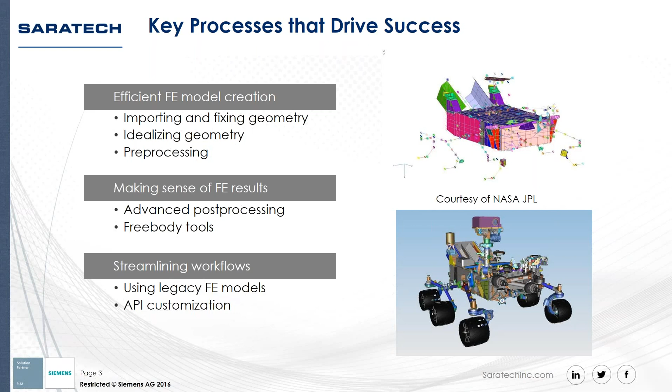In this webinar, we'll be covering 3 main chapters, and we'll address many of the issues that can be found in the simulation process and show how they can be overcome. The areas we'll be looking at are the creation of an FE model, going from reading in CAD data to idealization and model setup. Then we'll look at post-processing of results and how that can be handled efficiently. Finally, we'll look at how you can streamline your workflows, in particular the power of the Application Programming Interface, or API, and how you can efficiently work with legacy models.

FEMAP is the graphics program that provides pre- and post-processing functionality to build the simulation model and prepare it for analysis by the solver, then review results afterward. FEMAP opens up simulation by being both CAD independent, where CAD data can be accessed from just about any source, and solver neutral, so FEMAP can create simulation models for all the major commercial solvers with a high level of integration with the Nastran solvers. The modeling and visualization capabilities are all accessible within an easy-to-use and intuitive user interface, which brings many benefits, including increased productivity, a reduced learning curve, and training overhead.

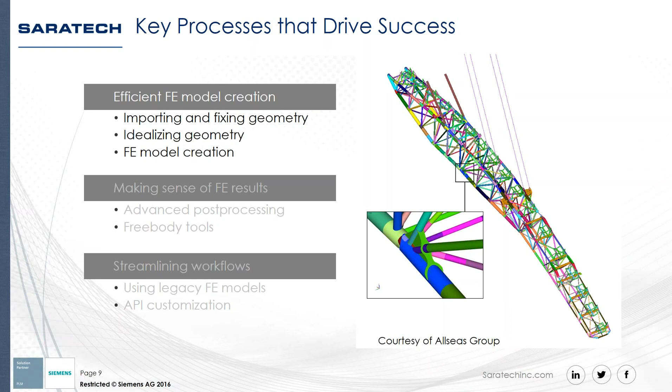In this first chapter, we'll cover the areas in pre-processing where FEMAP can help you create an accurate FE model as efficiently as possible, while overcoming the traditional obstacles that analysts face every day with the use of existing CAD data, idealizing that CAD geometry, and then the process of meshing that geometry to create an FEA model.

The flexibility of data flow is key to a standalone, CAD independent program like FEMAP. FEMAP can leverage and import the CAD model for most CAD systems and then use it as a starting point to create the simulation model. The FEMAP modeling engine is based upon the Parasolid modeling kernel, which is the same as that used by SolidWorks, Solid Edge, and others. So FEMAP and Solid Edge are fully associative, which allows the direct transfer of parts and assemblies.

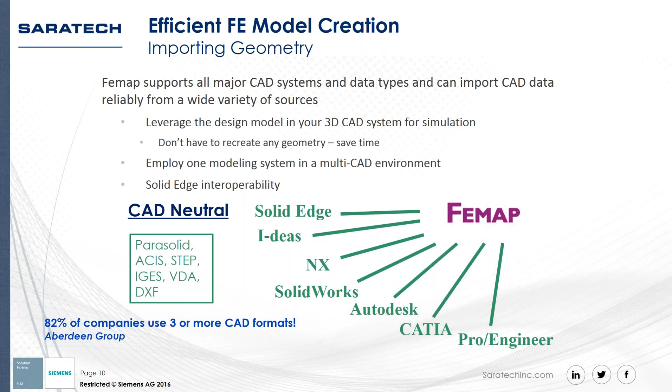Once the CAD model has been successfully imported into the simulation environment, there are various challenges that have to be overcome. In general, the CAD model contains more information than is required to create a simulation model, with details like fillets, chamfers, and holes that may just be too small to be of any significance. If left in the model, they will lead to the creation of small elements that try to capture the small detail, giving rise to overly large FEA models.

Besides small detail, the CAD model may also contain problematic geometry that can impede the creation of a finite element model. Items such as sliver surfaces, short curves, etc. will misguide the mesher, and if left unheeded, can lead to the creation of badly shaped elements.

So how can FEMAP help? Well, FEMAP has tools that will automatically or manually defeature a model without oversimplifying the model data or losing any vital modeling detail.

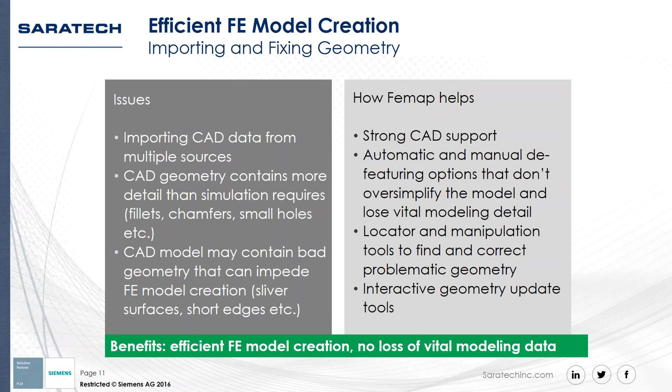Locating and removing troublesome geometry such as slivers, gaps, and short edges is one of the main challenges that has to be overcome in the creation of a finite element model, as they lead to badly shaped elements. Even finding where these problematic entities reside can be a major task.

This is where FEMAP's locator on the meshing toolbox comes into play. It's a dialog that you can use to control the search parameters and then locate all of the troublesome curves and surfaces quickly and easily.

Having located the problematic geometric entities, there are a number of tools available in FEMAP to make corrections and allow an accurate, well-shaped mesh to be created, such as combining curves and surfaces to merge adjoining surfaces and producing a smoother, more regular geometry model that's ready for meshing.

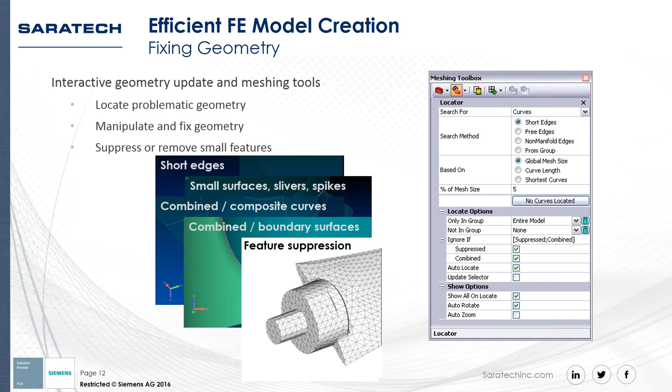Some other aspects of geometry handling include the ability to remove unnecessary features like small holes, fillets, and chamfers from the geometry model, again, to create a better mesh.

Besides the manual tools available for geometry cleanup, FEMAP also provides automatic capabilities for geometry preparation, which makes the task of meshing much easier and faster.

FEMAP performs some proximity checking, which also allows unnecessary detail and small features in the geometry to be identified and removed. The methods of removal are similar to the manual tools mentioned previously and include combining surfaces and curves, small feature suppression, and surface splitting at strategic locations.

The extent of geometry changes is controlled overall by user-defined tolerances.

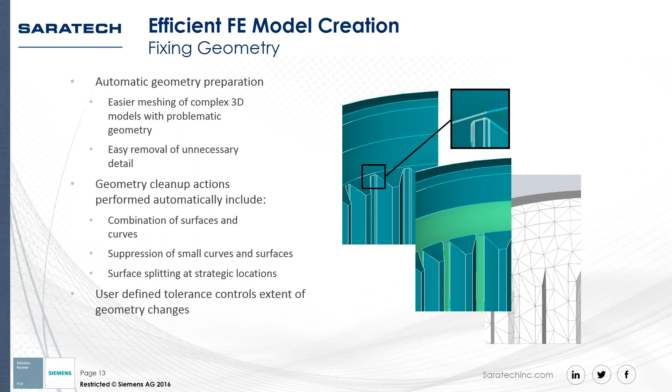Here we'll cover the typical challenges that arise when trying to create a more efficient and accurate FE model. More advanced analysis like dynamic response and nonlinear are more numerically intensive and can also require an approach requiring multiple solves.

So there are certain approaches in finite element modeling that adopt different model topologies to improve the efficiency of the model by reducing the model size without compromising accuracy.

Solid element meshes cannot realistically be used to represent certain modeling topologies such as thin-walled or frame-type structures. The resulting models would be unmanageable. This requires a departure from 3D to 2D and 1D finite element types through model idealization.

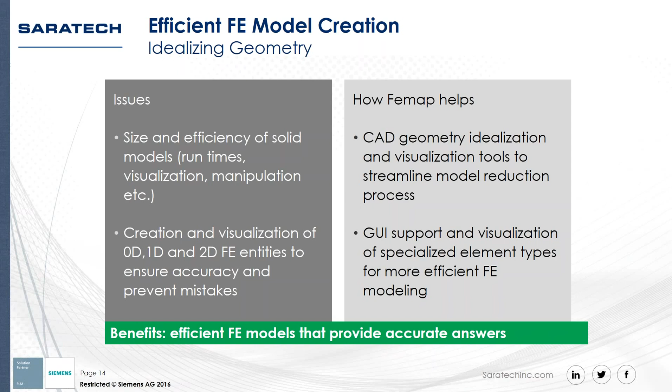Thanks, Jeff. So let's talk about some of those tools we can use. First off, mid-plane extraction is a very powerful tool designed to deal with these thin-walled structures that Jeff just mentioned. These geometries are difficult to model accurately using solid elements.

You're going to be creating huge, unmanageable simulation models, so those really lend themselves to being modeled using 2D shell elements or plate elements. So you create a much smaller but still accurate model of the structure.

Mid-surfacing tools in FEMAP offer both automatic and interactive manual options, and you can handle varying thickness solids as well. There are many options to hide the exterior surfaces, which greatly enhances the visualization of your model and greatly facilitates working with surfaces that are interior to a solid.

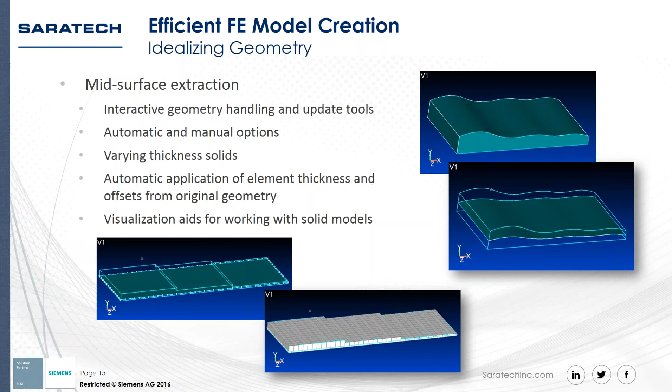FEMAP also automatically applies offsets and thicknesses from the original solid geometry to the elements meshed on those surfaces, so that ensures that your FE model matches the original geometry.

A big part of modernizing the workflows associated with geometry updates and manipulation is really evident in FEMAP today, with the ability to work directly and interactively with the geometry that you see on the screen.

You can pick points to be moved. You can click on 2 points and the surfaces connected with those points will join together automatically for you. When surfaces are joined in this way, they're automatically connected together to form a single closed body, so you don't have any free edges.

Using these techniques, it's possible to move entire entities. You can move a particular aspect of an entity to extend the width of a slot, for example, or remove it completely by deleting just a single edge. Again, this is all direct and interactive, so geometry editing is fast.

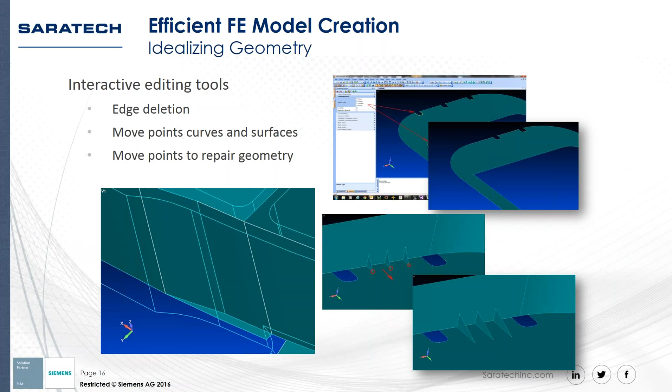Another important modeling capability for consideration when you're talking about geometry idealization is beam modeling. FEMAP offers a method of automatically determining the physical properties of any cross-section that you define, and it also offers a library of commonly used cross-section shapes.

You also have full beam visualization that's available to you, so you can view beam element results as if they were solids, so it's very easy to check the orientation and offsets for beams. Once you solve the analysis and are looking at results, you can view the beam shear forces and bending moment diagrams as well, and also output the contour plots.

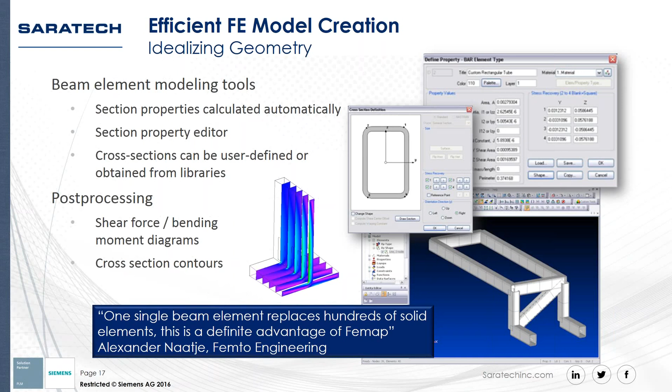One customer of ours, Spaceworks, took full advantage of all of these advanced modeling functionality that FEMAP offers when they designed the next generation plug-and-play satellite structures. A series of elegant but very complex FE models were created using FEMAP to quickly gain insight into the structural performance of the spacecraft structures.

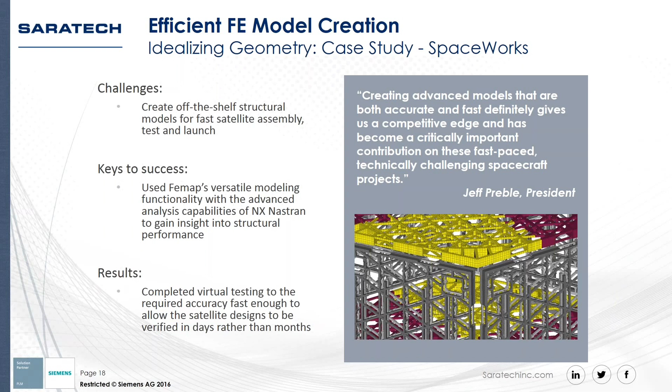If a standard design approach had been used to simply mesh the geometry with tetrahedral solid elements, the resulting model would have contained tens of millions of nodes and elements and would have been way too large to solve. But using a hybrid hexahedral and plate element approach, they were able to get a much more manageable model with only 800,000 nodes, and that proved to have a very good correlation with the experimental results.

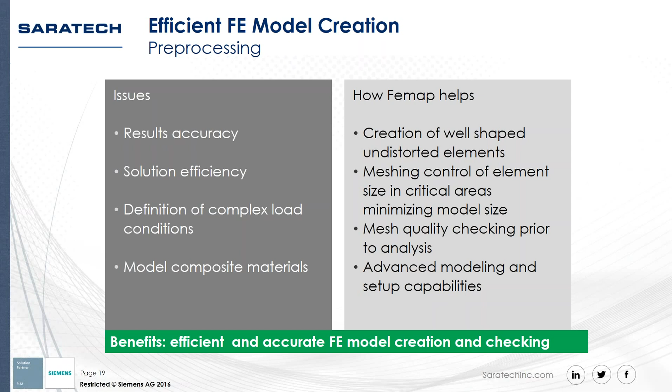That really is awesome, Jeff.

So here's that meshing toolbox that Jeff just mentioned. It is fully interactive and lets you modify geometry either prior to meshing, or also use it to update an existing mesh. You have different tools such as geometry splitters, which can be used to split large surfaces into smaller ones that can be mapped mesh to get more regular quadrilateral elements.

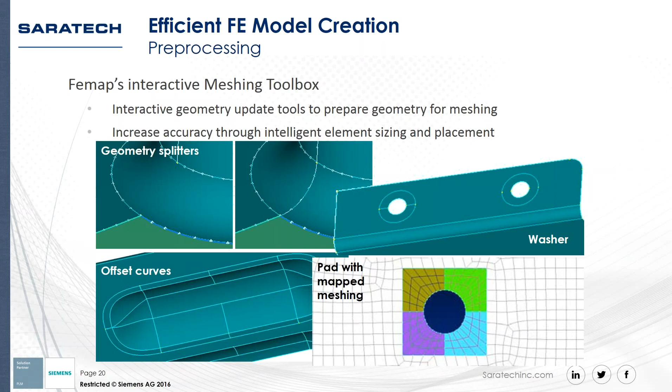You also have offset curves, which let you create map meshable regions around complex geometry with various curves, as you see on the bottom left here. You can also add washers and pads, used to add offset curves or squares to create map meshable regions around holes, which are typical stress raisers. So you would usually want a very good refined, regular mesh around those holes for accuracy.

So here you can see you have full control of meshing parameters on the underlying geometry with the meshing toolbox, as well as setting the number of elements on the edges or surfaces of curves. You also have further options to select mapped meshing, which ensures an even distribution of well-shaped elements over surfaces.

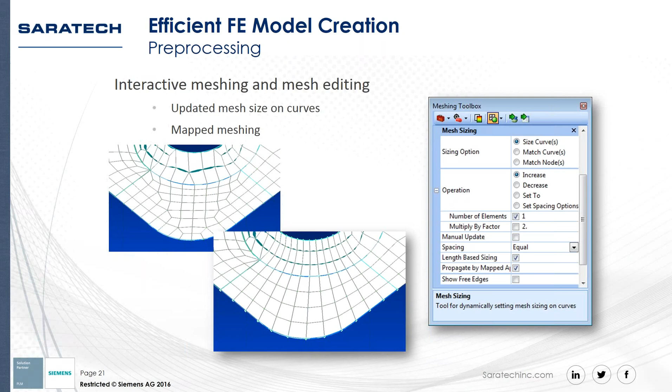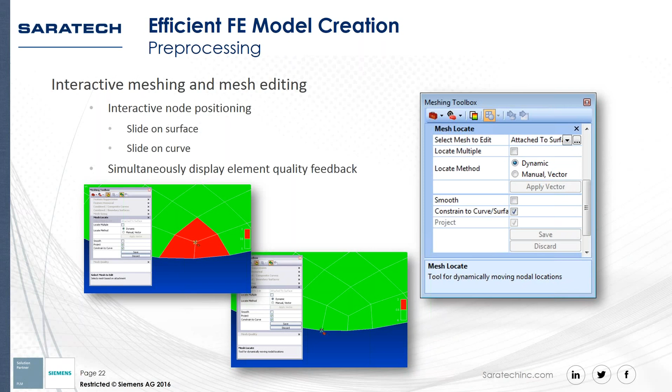And for very detailed mesh adjustments, you can manually move individual nodes around on the underlying geometry, and FEMAP ensures they adhere to the underlying surface or curve, which can be useful to improve the element shape so that it can pass the selected element quality criterion.

Element distortions and other element quality checks are included in FEMAP's meshing toolbox and can be shown interactively during the meshing process, which is good for ensuring a quality mesh in areas of high stress gradients, important for accuracy.

Some other checks available in FEMAP allow you to verify that there are no discontinuities in the model by viewing free edges and faces, which is something that cannot be checked by just looking at the model.

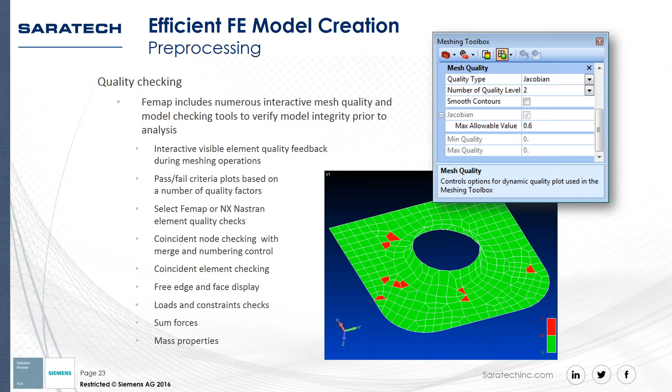Also check coincident elements and nodes, which can also be indicators of discontinuities, load checking by summing forces, and mass property checking.

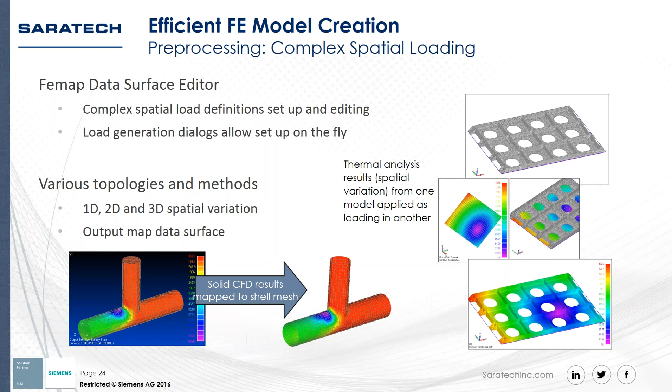A powerful method of simulating complex loading within FEMAP's pre-processing functionality is the data surfaces, which are useful to define more complex loading conditions. Data surfaces come in various topologies from one to three dimensions, as well as some special cases. Another example shows how a temperature distribution can be oriented and applied to a component for further analysis.

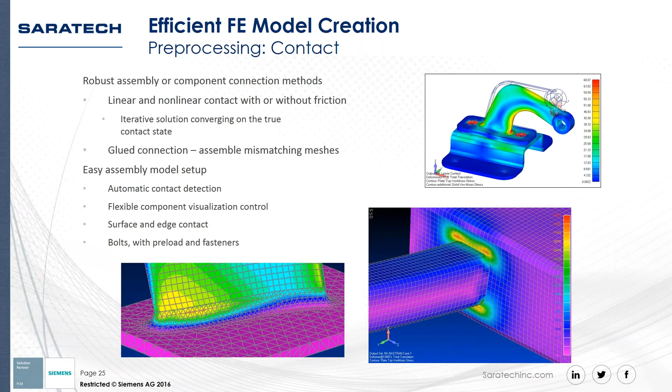I'm sure many of you are very familiar with the ever-increasing use of composite materials in manufacturing, which seems to be quite the growing trend these days.

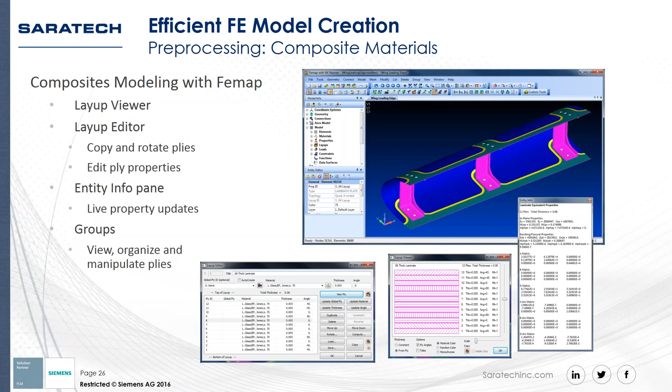FEMAP has various capabilities that can help you quickly view and understand an existing model, or create a new layup from scratch. A big challenge with modeling composite materials is visualizing the model and layups. FEMAP's grouping functionality can help here, as you can define groups by layup, which makes visualization very easy.

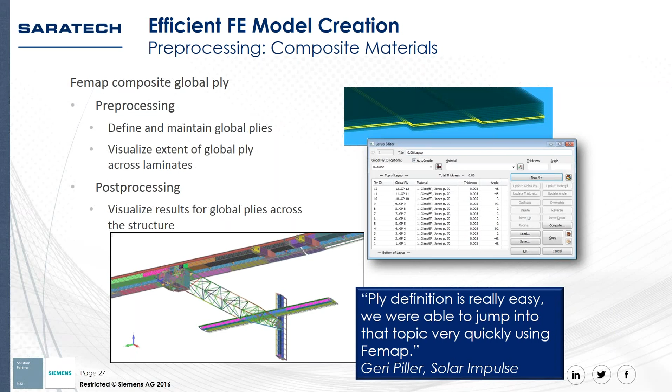With the idealization of composite structures, ply discontinuities due to drop-off create situations in the finite element model where adjacent elements contain differing numbers of plies. Results interpretation of composites can therefore be a laborious task requiring manual identification of corresponding ply results from element to element across the structure. The FEMAP global ply capability addresses this problem by allowing you to identify global plies and then use them to visualize results on continuous plies across the structure.

Thanks, Jeff. That really is some powerful stuff there. So let's see a demonstration now of some of these geometry idealization and meshing tools that we've been talking about, and we'll also set up some boundary conditions and analysis parameters.

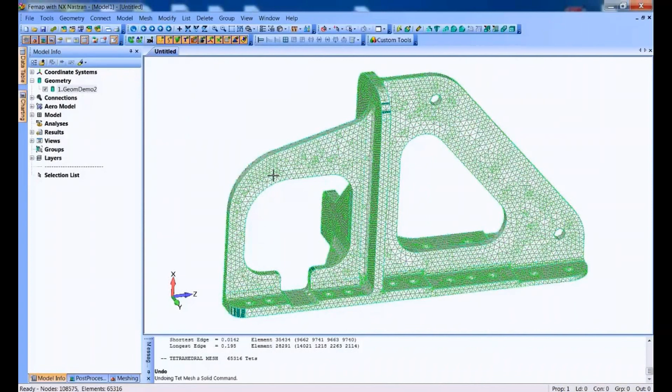So you can see a solid bracket, but you can see we have varying thicknesses around the bottom base of this part. So we can throw a tet mesh on here, and of course we get a very good quality mesh. You can see the collapse. The worst aspect ratio is 7, which is fine. But we have about 65,000 elements. So let's see what else we can do.

We can actually use an automatic mid-surface command to represent the geometry using a 2D plate or shell type element. And here, just showing in a transparent view, we can see the rest of the solid that we use to create the mid-surface. But we have all of these lines that separate those different thickness areas, as you recall from the original geometry. So we can use a meshing toolbox to basically imprint all of those edges to separate all those faces, so we can get those varying thicknesses.

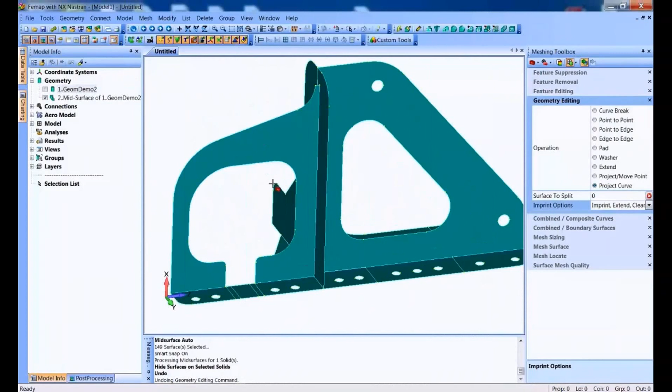So once we have imprinted all of those separate areas, we can turn that solid geometry back off, and then of course use the meshing toolbox and many tools to get a very nice mesh like you see here. But of course, we still don't have those different thicknesses represented.

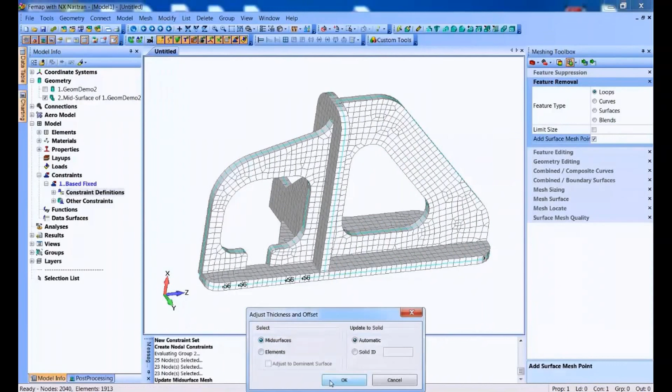So we can add a constraint to the nodes on the bottom, for example, and then very quickly show a visualization of the thickness of that plate. Here we can see it is a constant thickness that we define, but with a quick update of the properties, you can see we can immediately have FEMAP automatically update all those different thickness areas. And that is automatically retrieved from the original geometry.

Once you have all that done, you can run the Nastran solution and come back and post-process your results directly right in FEMAP. This is all automated. For example, a modal analysis, you can quickly see all of the frequencies and, of course, animate them and view the exaggerated modal deformed plot, where we can see what the structure is doing in this analysis.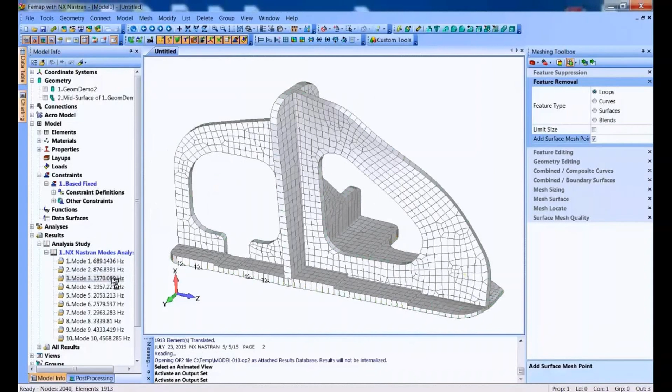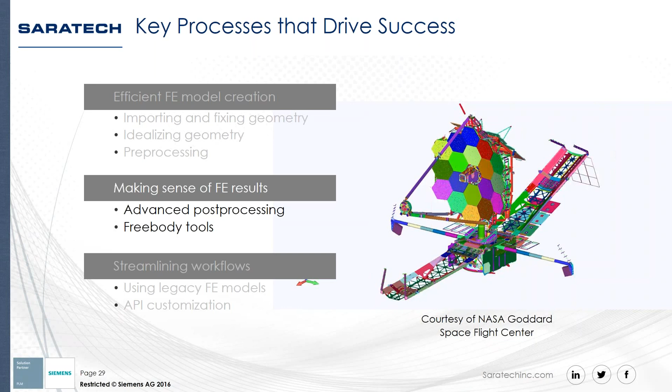So in the second chapter, we'll cover the areas in post-processing where FEMAP can help you efficiently view and comprehend the results, giving you a quicker understanding of model behavior. We'll cover some of the advanced post-processing capabilities that FEMAP offers, and then look at free body functionality that can be used to gain an insight into how loads are passing through the model.

As models continue to get bigger, the amount of results data produced by the solver also increases. When you also consider performing a more advanced type of analysis, such as a dynamic response or nonlinear analysis, then the data created increases even more, as these types of analysis produce incremental output data in steps of time, frequency, or loading. This then gives rise to various challenges such as long import times to read in the results data, increased memory usage in processing the results data, and also managing the consequentially large database files.

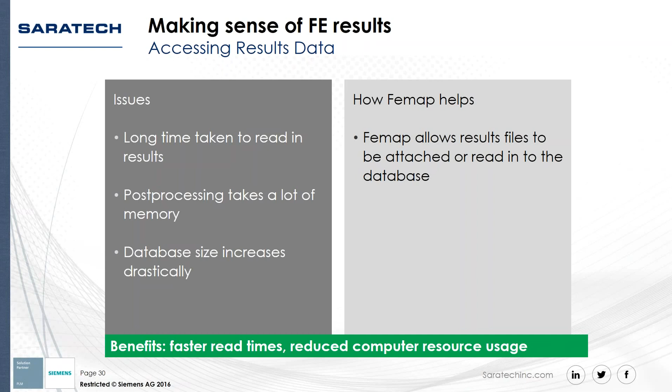FEMAP can help with these issues with the ability to attach results files to the database instead of reading the results data in.

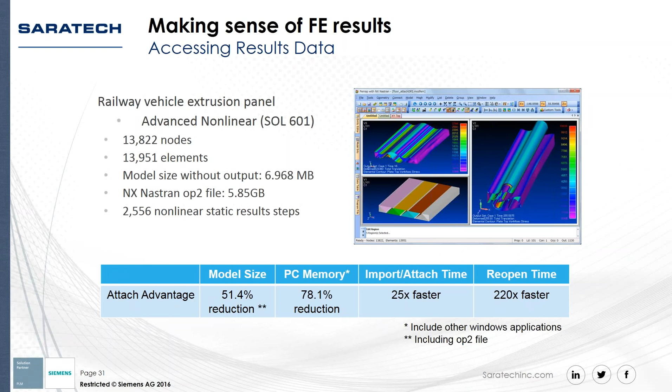In a benchmark test to test their external results capability, you can see that the data access times were much faster when attaching rather than importing the data. Also, a lot less computer memory was used for results post-processing.

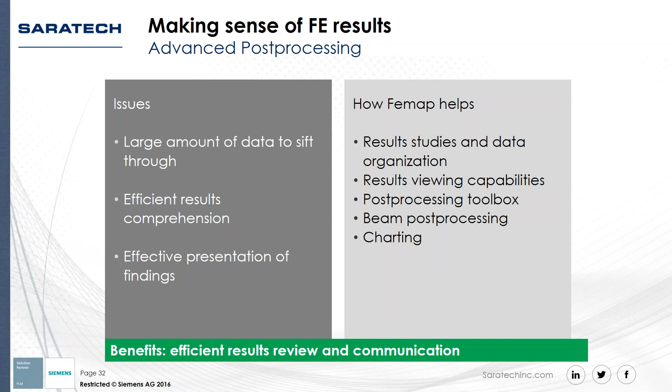Another issue is the ability to view the results efficiently. As we've seen, the amount of results data created by the solver can be potentially huge, which makes the task of going through and reviewing the data much more onerous. For the sake of speed, this requires a set of tools that will allow you to review the critical results data efficiently. These tools should also help you comprehend the behavior of the design and allow you to communicate the findings effectively.

So output sets can be organized into analysis studies to help order the output data into more understandable groups. These studies can be created automatically or also manually when you are attaching the results data, like Jeff just talked about. Organizing your output data in this way makes it much easier to find, also even to delete, and do different operations on a collection of output sets from all your different analysis runs. So for example, you can group output sets from a statics run, a modal analysis, or even time steps from a transient analysis, all into separate analysis studies and operate on them separately.

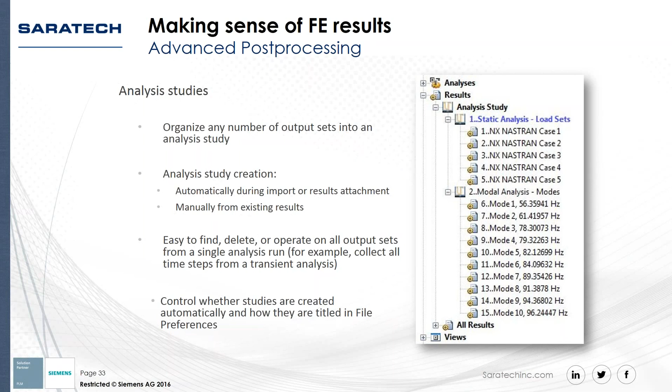You can even animate studies to create a multi-set animation using all of the output sets in a study. There's also a tool that lets you create an envelope, which will create a complete output set using the selected type—for example, a max stress, minimum, or even a maximum absolute value for all of the output sets in that study.

There's a result set processing data surface available that we briefly talked about before, so different factors can be applied to each output set using a spreadsheet-like form.

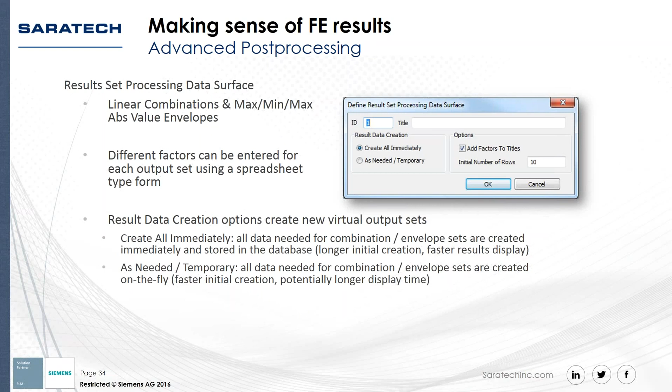Post-analysis, FEMAP offers some very powerful functionality to help you review all the results and understand the behavior of the model for applied loads and boundary conditions that you have. Typically, a lot of results data can be generated by the analysis, so the ability to investigate all of this data efficiently and present it concisely is one of FEMAP's strengths.

You can animate display plots, for example, view results inside a solid model with the dynamic cutting plane, as well as the dynamic ISO surface tool. FEMAP offers full control over your desired output requests, and you have many options, of course.

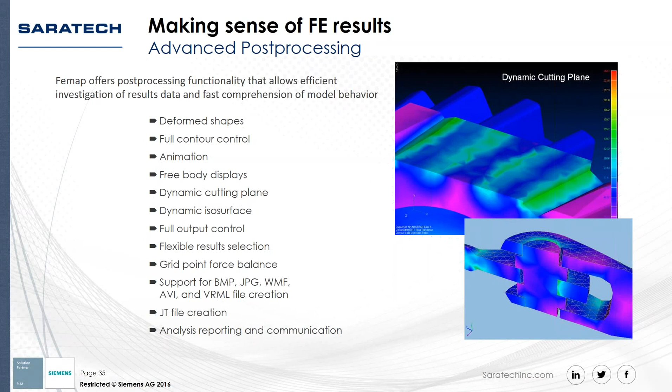In terms of exporting results from FEMAP, all the standard forms of image and animation output are supported, including JT files, which allow interactive review of the model with the results.

For easy access to all these viewing options, the post-processing toolbox is available, similar to the meshing toolbox we saw before. This consolidates the most popular viewing options into a single pane or window, allowing you to set up and change options interactively, reducing the learning curve and training time to become proficient quickly in using all of these post-processing capabilities.

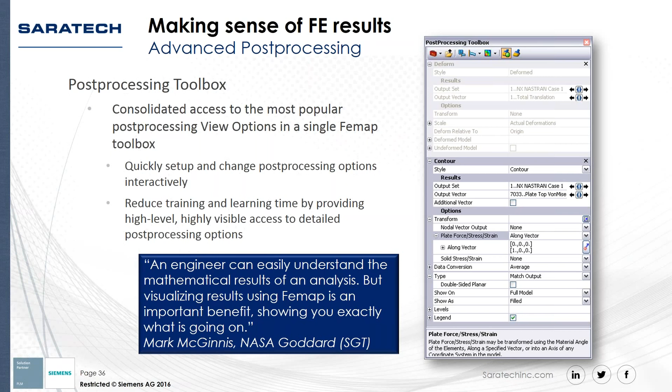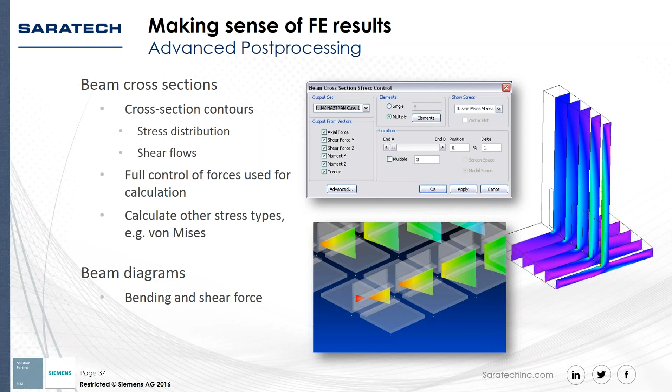Let's see a demonstration of some of these beam post-processing tools. We'll see how to apply some load factors and post-process those additional virtual output data sets as well, and show some of the detailed beam results capabilities.

Here we can see a structure which was originally a solid, but we created some mid-surfaces as well as some beam structures to simplify the model.

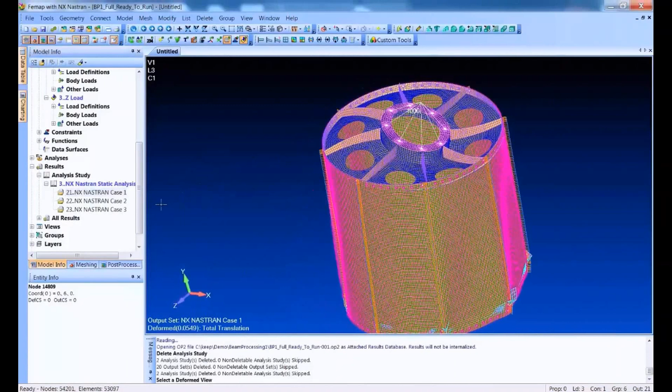Here we can view an animated plot. Of course, again, this is exaggerated, but we have many tools so we can see the different results. In this case, we have 3 load cases for the X, Y, and Z, so you can see the structure deforming in all 3 of those directions. So we know that the analysis was correct.

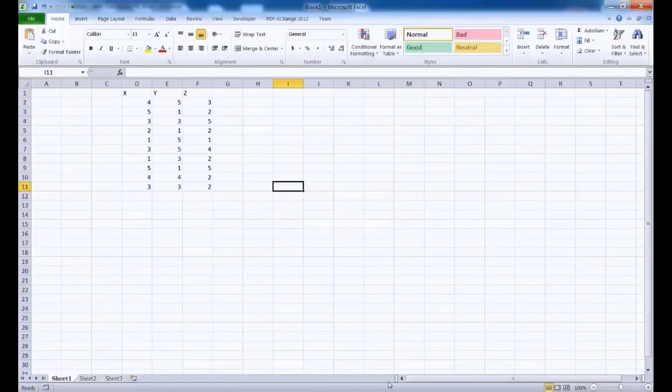Here, let's say we have an Excel sheet with a simple load combination table. We can actually copy and paste that into our load combination, and very quickly you can see we can create many additional load sets to save you tons of time. Once you have those set up, we can very quickly get the beam results isolated, for example, as you see here.

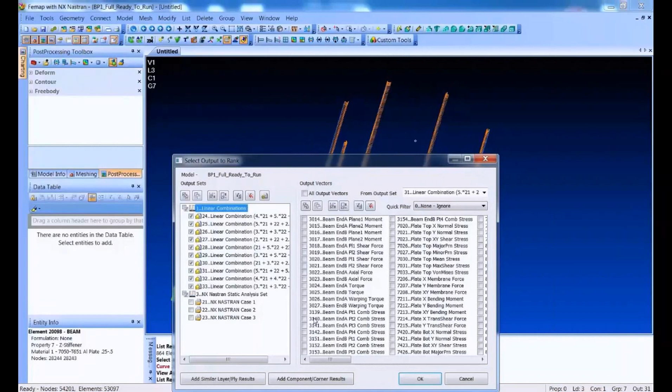We can very quickly pick up on all these virtual output sets we just created using the factors and combinations here. Then we choose the beam output results we want, and we can view those results in the data table, which can of course be then sent to Excel or Word or any other type of document you want, and also on the FEMAP screen itself.

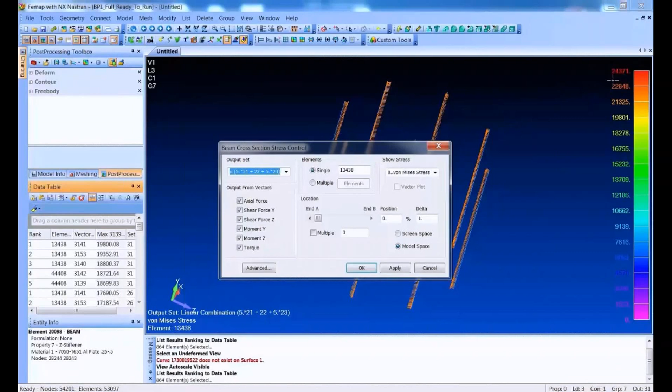We can use the beam cross-section controls here to visually see the different beam results, and you can see you have many different factors that are taken into account: the axial force, shear forces, moments, torques, and so on. So depending on what you want to include, of course, these plots will appear differently.

Notice a combined shear stress in this case, or you can also view a vector plot. This will definitely show you a great representation of the actual shear flow going through the model.

Or instead, you can of course view the specific Y shear stresses, Z, or the von Mises stress, or the entire structure as well.

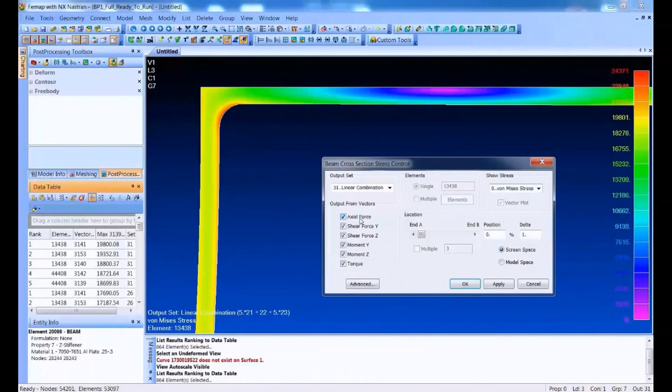As I mentioned before, choosing the different output information will of course change those results, so you can choose to include the shear force in the Y, the moment in the Z, and so on.

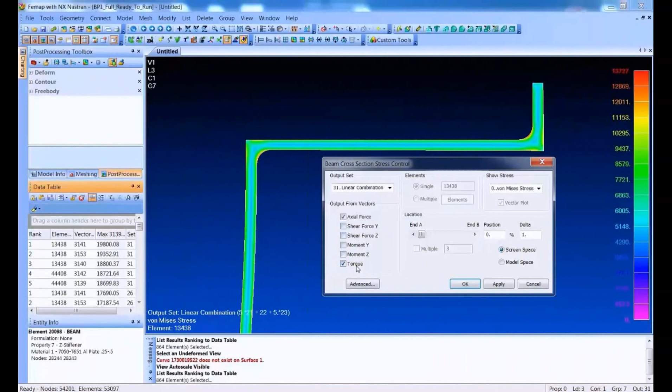FEMAP offers full control over desired output requests of the analysis itself and results selection for review. XY plots are available with a recently expanded charting capability, and for visualization of shell models, contour results can be plotted on shell elements as if they were 3D elements, showing plate thicknesses with a linear stress interpolation throughout the thickness.

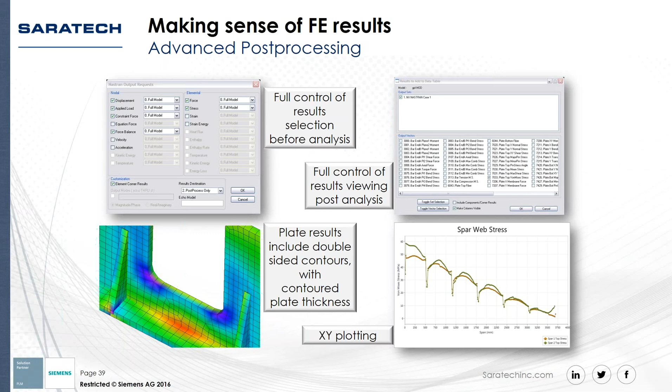In the FEMAP user interface, there's a pane dedicated to the charting functionality that can display XY plotting data in a modern format that can be easily inserted into a report. You can create data for charting from various sources such as results data or function data, and the charting data is automatically updated when the source data changes. And of course, you'll have full control over chart styles, including line styles, colors, markers, grid lines, and fonts.

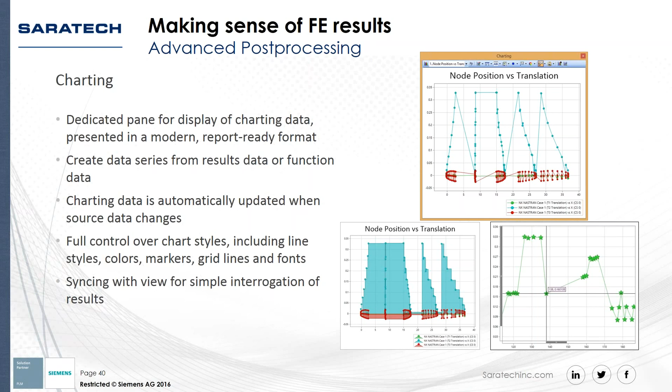Another method of manipulating output data in FEMAP is the data table. You can send either modeling or results data to it. The data table then allows you to sort, filter, and evaluate data that it contains. You can use it to rank results or compare data from different output sets or models. You can also copy the data to the clipboard and then transfer it to third-party programs like Microsoft Word or Excel.

Another issue is the ability to clearly evaluate running loads through the structure. Model and results comprehension can be very time-consuming. So to help do this, FEMAP includes the free body capability, which accesses and visualizes the grid point force balance output data. You can generate free body diagrams, interface loads between components within the model, and calculate and view section cuts.

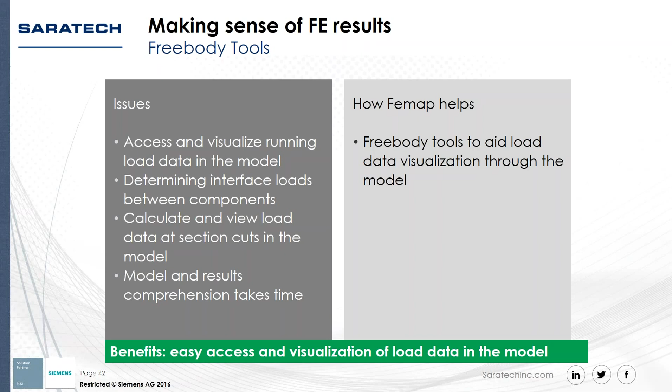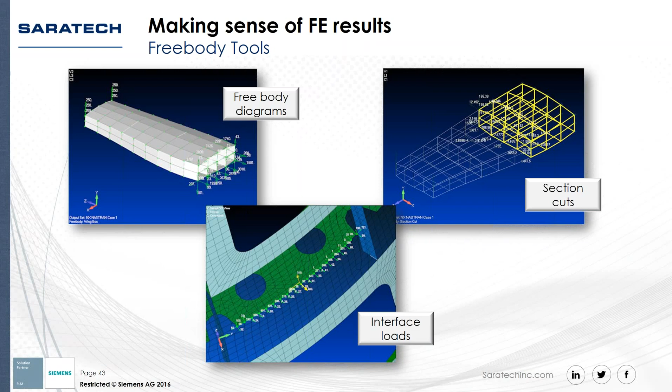Grid point force data recovery that is calculated by the solver provides some very useful output that helps to determine load paths throughout the structure. FEMAP then provides a couple of capabilities that work with this data to provide free body diagrams for parts and components, and for more detailed scrutiny of interface loads between components in the model.

Global local modeling is a general topic where results from a coarse global system model are applied as boundary conditions to a more refined model of a component or subsection of the global model. FEMAP has implemented tools to help make this process easier for the user.

The new tool allows the user to select source nodes in a global model free body and target nodes in a local refined model. The tool then creates RBE3 connections in the local model to apply the free body loads and automatically creates local model load cases from the selected global cases.

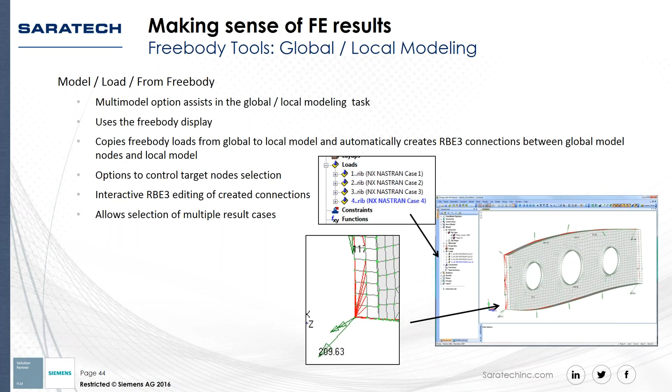The RBE3 connections can be edited interactively using the new graphic rigid element editing tool. Multiple load cases are supported, and all selected cases in the coarse source model are then copied into the detailed model.

One of our great customers, Lockheed Martin Space Systems, uses FEMAP with NX Nastran as a solver for the design of the multi-purpose crew vehicle and faced challenges that included analysis that required over 900 load cases and large models up to 1 million elements and a high volume of results data to sort through.

Keys to their success included more efficient workflows due to the tight integration between the solver and pre- and post-processor, and ability to import Pro/E CAD data. As a result, the company successfully completed complicated case studies in a short period of time.

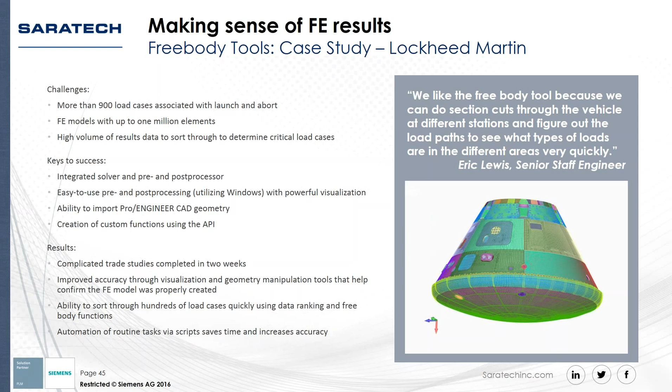They saw improved accuracy due to FEMAP's geometry manipulation and visualization tools, the ability to sort through many load cases utilizing the data ranking and free body functions, and then FEMAP's API, which allowed automation of routine tasks, saving time and increasing accuracy.

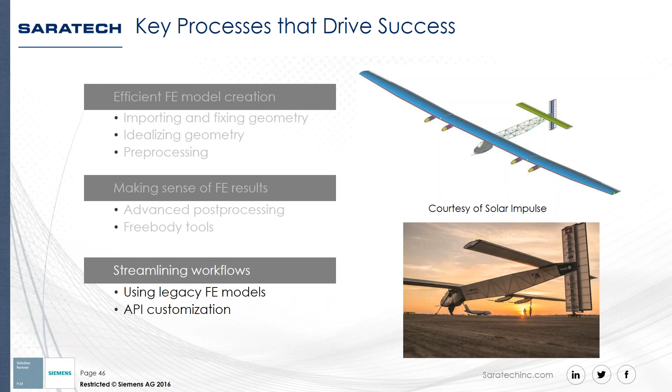So in the last chapter, we'll look at a couple of aspects of how you can streamline your simulation workflows. We'll review some of the capabilities FEMAP can offer to help you work with legacy models. Also, when you have a repetitive task to perform, we'll demonstrate how such tasks can be automated through the use of FEMAP's Application Programming Interface, or API.

A number of issues arise with dealing with legacy models. You may only have the bulk data and no geometry, so how can you then make changes to the model easily? Alternatively, you may have both geometry and the bulk data, but from separate sources, so how can you reassociate the two to create a single model? Also, you may be faced with the task of having to merge different models together, which are likely to have interfering numbering systems, which can be a tedious, time-consuming task.

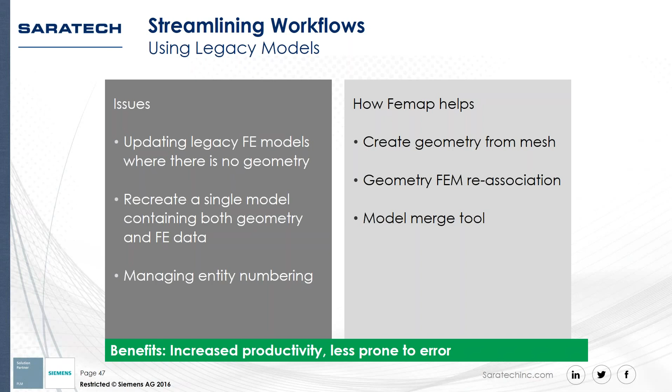FEMAP offers a number of tools that can help with each of the above situations. We'll take a look at them in the next few slides.

FE models can be updated or remeshed more easily. You can work on individual patches of the original mesh and turn them into geometry, which is automatically associated to that mesh. With the new geometry in place, it can be modified using the geometry tools and then remeshed. Further mesh changes can be made using the meshing toolbox, or you can simply delete the mesh once you have the geometry and add cutouts and other modifications and then remesh.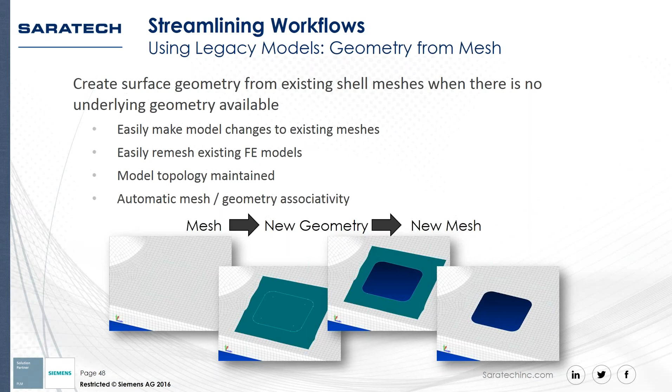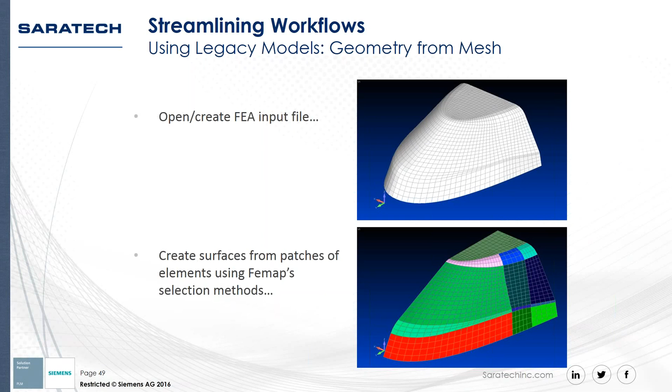So let's look at an example of how you can create geometry from a mesh for even challenging shapes by adopting a simple procedure. In the model shown here, the first task is to identify simpler geometric parts of the FEA model, rectangular areas isolating highly curved parts of the model, and then create geometric surfaces from these patches of elements.

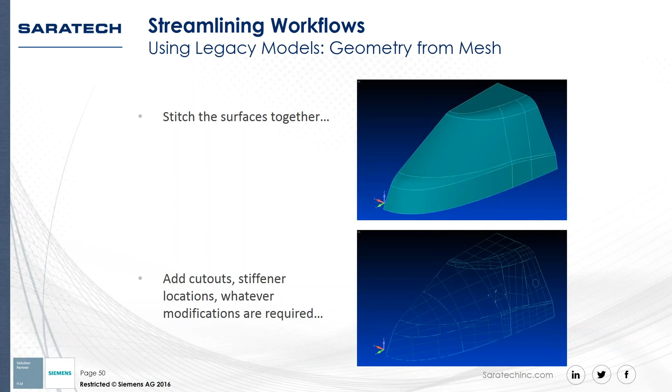Once all of the geometry surfaces have been created, they can then be stitched together, producing one single solid. At this point, you have a geometry model that is representative and has the same topology as the initial FE model, and you can now make any changes that are required to this geometry.

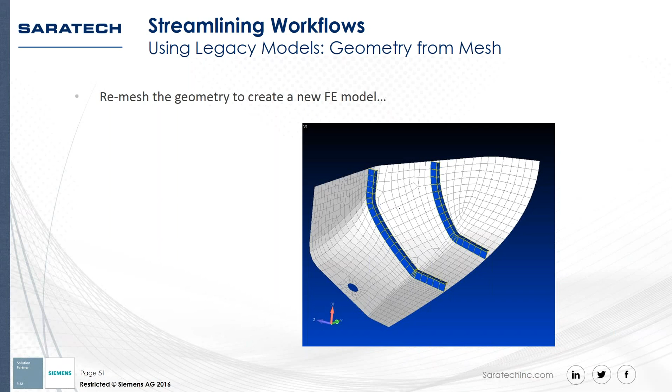Then once all the required changes are complete, simply remesh the updated geometry to create the new mesh.

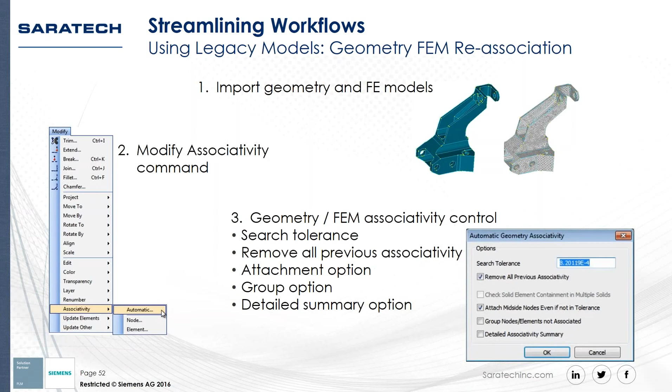You may be faced with a situation where you have moved a finite element model and a geometry model over from another system, but the method of transfer requires separate paths, leaving you with two separate models. FEMAP can easily reassociate the two together so that they both exist in a single database. Naturally, the models must share the same topology, and you can specify search tolerance to control this. There are various other controls that can help guide the process, and FEMAP can provide a detailed summary at the end of the operation.

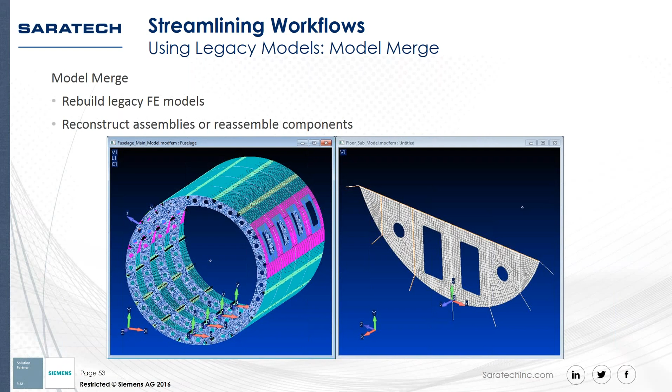This slide begins the discussion of the file merge command, commonly referred to as the model merge. The model on the left represents a portion of a fuselage, while the model on the right represents a section of subfloor structure. Notice how the two models are not aligned with regards to the global rectangular coordinate system, but that's okay because this can be addressed when using FEMAP's model merge capabilities.

Thanks, Jeff. So here, sorry, skip the slide there.

Listed here in the model merge command, you can see all the different entity types which can be merged from one model to another. Also notice the entity selection, renumbering, and model orientation and transformation capabilities of this model merge tool. You can select any other currently open model to merge entities into the currently active model.

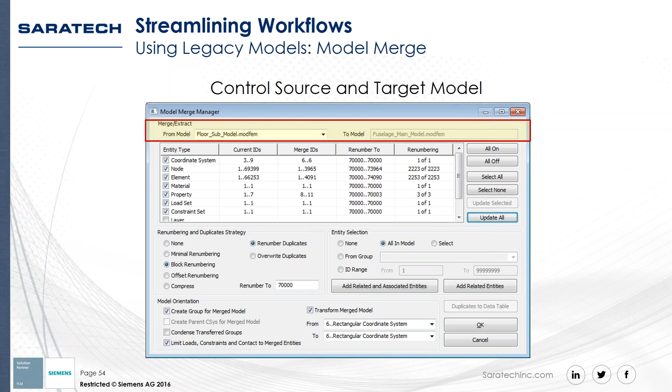The entities listed in the merge extract section will change automatically if you change the from model. You have many options to choose what to bring in, as well as methods for renumbering all the entities. One other major thing to mention here is the ability to transform the entities in the from model using a coordinate system and align them to a coordinate system in the to model. So you can see an animation of the various instances being placed of the subfloor into the larger fuselage model.

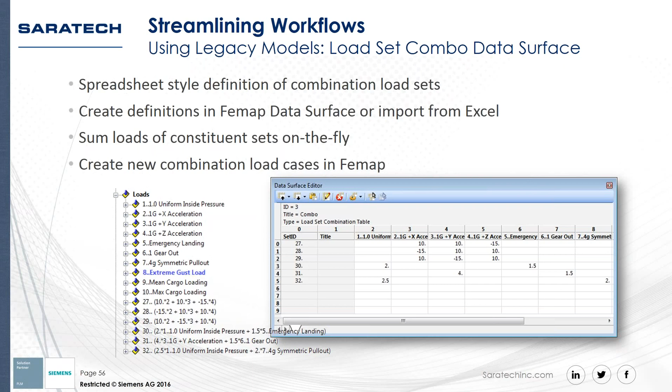As for the actual solving, setting up solver options for each model takes time, and engineers unfamiliar with a particular type of analysis may not know what is required. So FEMAP comes with great default settings for all the analysis types.

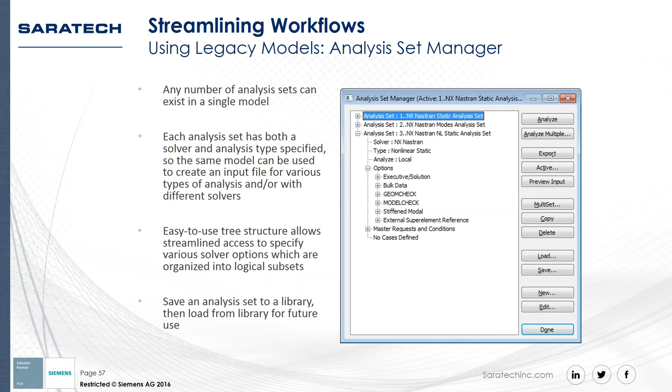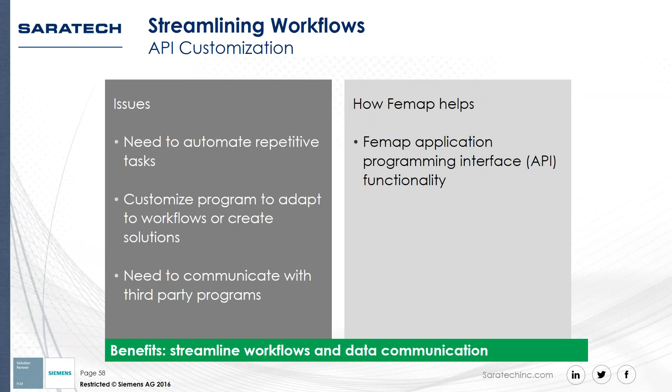Many tasks that have to be performed to create a finite element model, or even reviewing the results, can be very repetitive. FEMAP offers a powerful way of automating these repetitive tasks and even customizing workflows through the API interface. Interaction with other third-party programs is also possible, so you can actually exchange data between them.

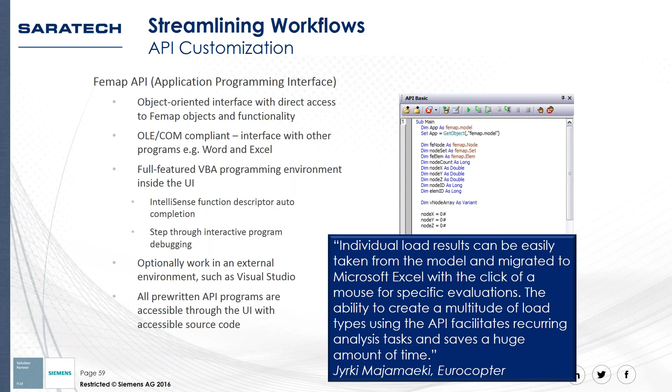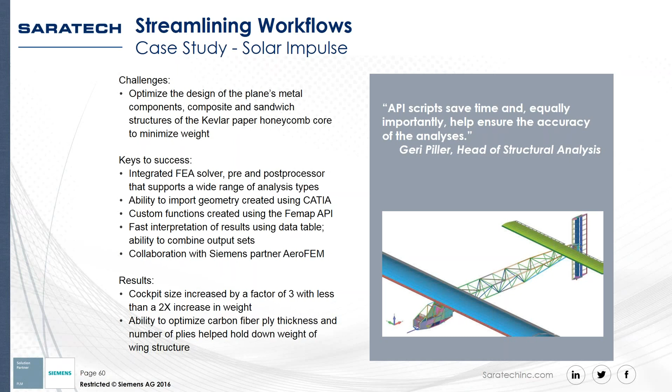Thanks, Dan. So to wrap up, FEMAP has a lot of powerful modeling and visualization functionality, all accessible within an easy-to-use and intuitive user interface, which brings many benefits, including increased productivity, a reduced learning curve, and training overhead.

In the pre-processing stage, FEMAP offers the ability to import geometry from just about any source and has the functionality to efficiently convert that CAD geometry into a simulation model. A key part of that is the meshing process, which is made easier with FEMAP's high-performance meshing tools.

In the post-processing stage, FEMAP offers a wealth of results viewing functionality to help engineers interpret the simulation results and better understand the model behavior. Essentially, FEMAP sets new standards in open simulation by being both CAD independent and solver neutral, in that FEMAP can create simulation models for all the major commercial solvers, and FEMAP is fully integrated with Nastran.

One last point about open simulation concerns FEMAP's application programming interface. The API allows FEMAP to become a powerful integration program for third-party solutions and significantly increases the portability of data into and out of the program.